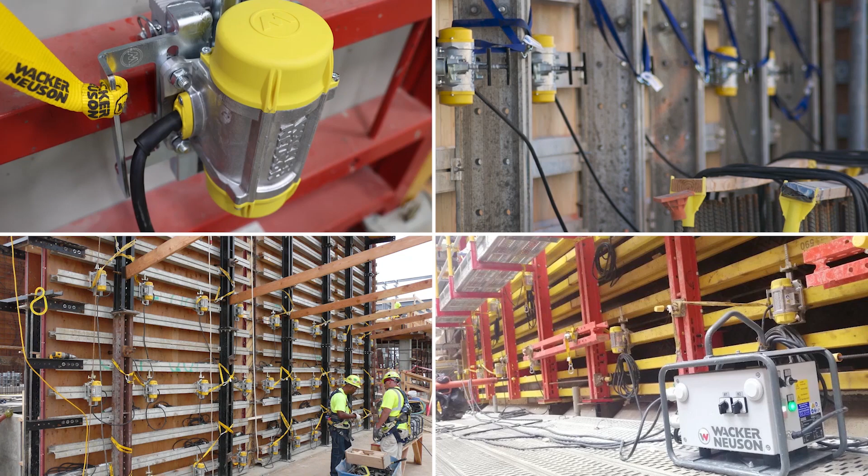Wacker Neuson offers many solutions for projects in the concrete construction industry. In this video, we're going to talk about the AR26 and ARFU26 external vibrators, their clamping systems, and the best recommended practice for different concrete consolidation applications, and how these units offer consistent power and performance.

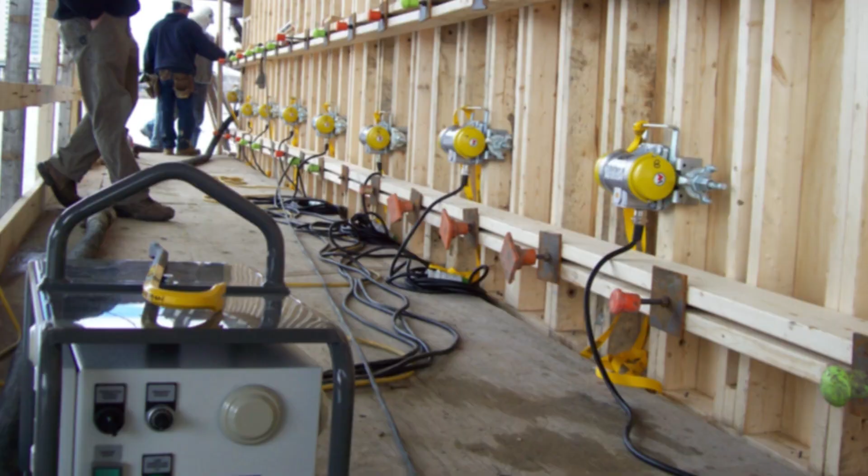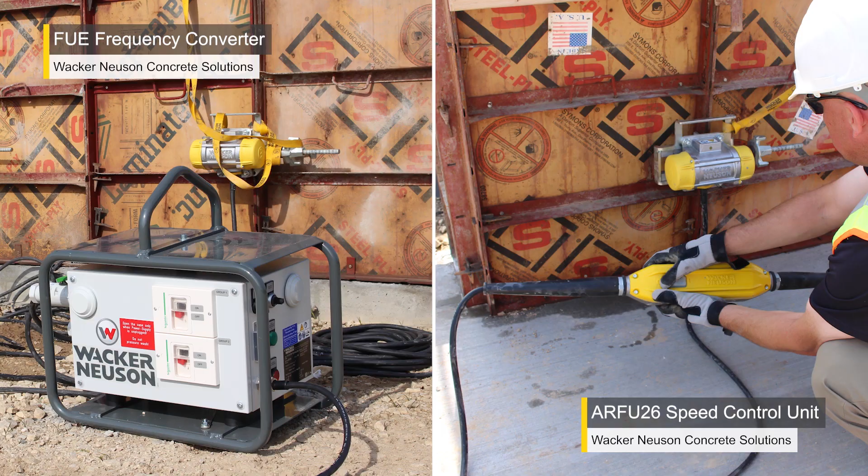Wacker Neuson external vibrators are designed for cast-in-place concrete formwork as well as light precast concrete jobs. These include areas that would be difficult to reach with internal vibrators, tall structures, or building structures with high rebar density. To control the AR26, we offer the FUE frequency converter and speed control unit. The ARFU26 is different because it runs on 120 volts and has a standard 3-prong plug.

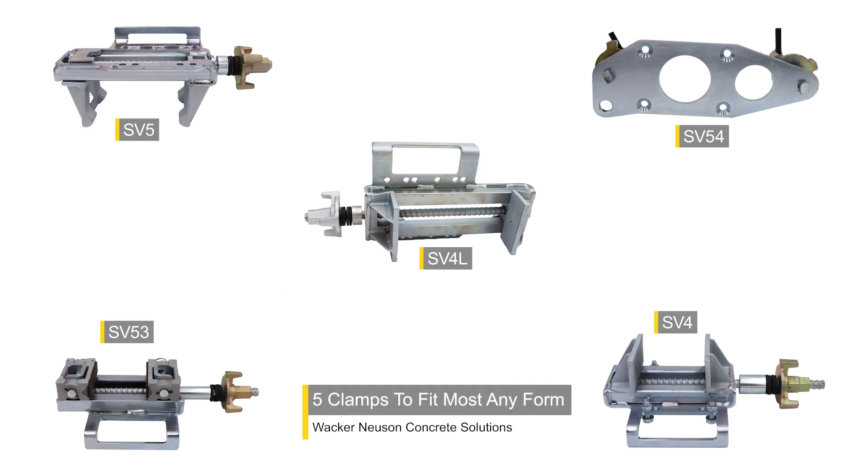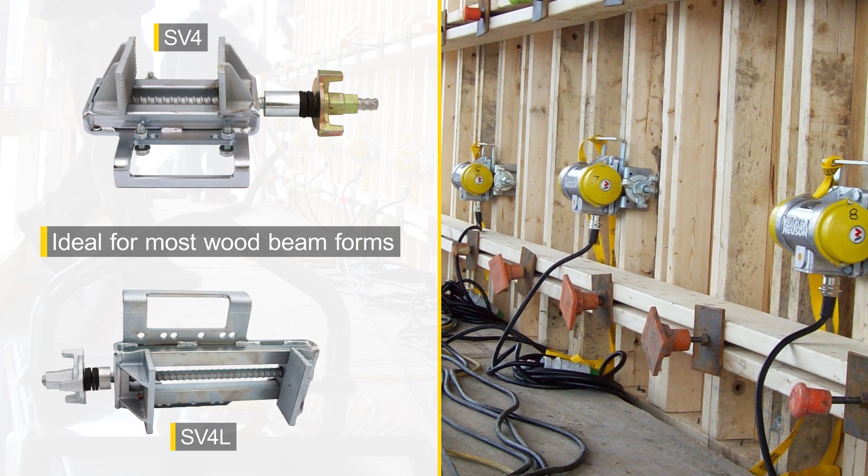Wacker Neuson offers 5 different clamping systems that are easily movable and can be applied to practically any type of vertical forming system used in the industry. They all come with a safety strap and necessary hardware for motor installation. The SV4 and SV4L are ideal for most wood beam forms. The only difference is the jaw opening size. On the SV4, the maximum opening is 4 inches. However, the SV4L can open up to almost 8 inches to fit larger beams or form joints.

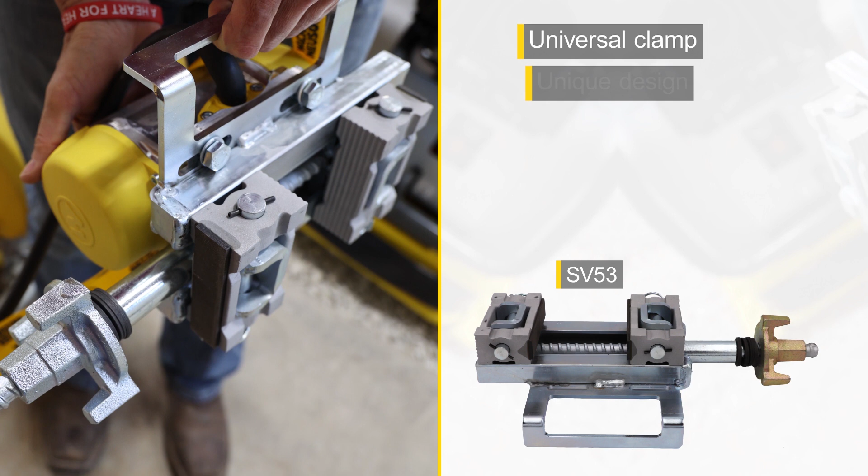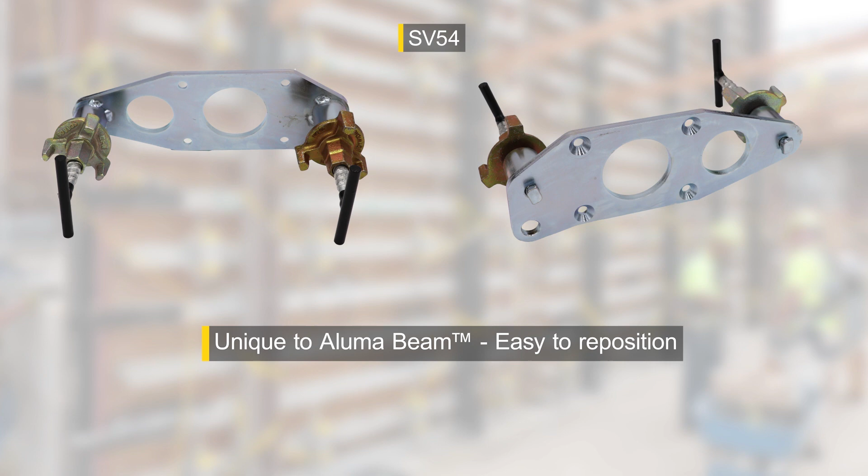The SV53 is a universal clamp that has a unique design with jaws that can be reversed to attach to either wood or steel beams, with different material on the face of the jaw. The SV54 is unique to Aluma Beam and allows for easy repositioning along the beam. The SV5 will work on most gang forms, with the flange design fitting into the inside channel of the beam design.

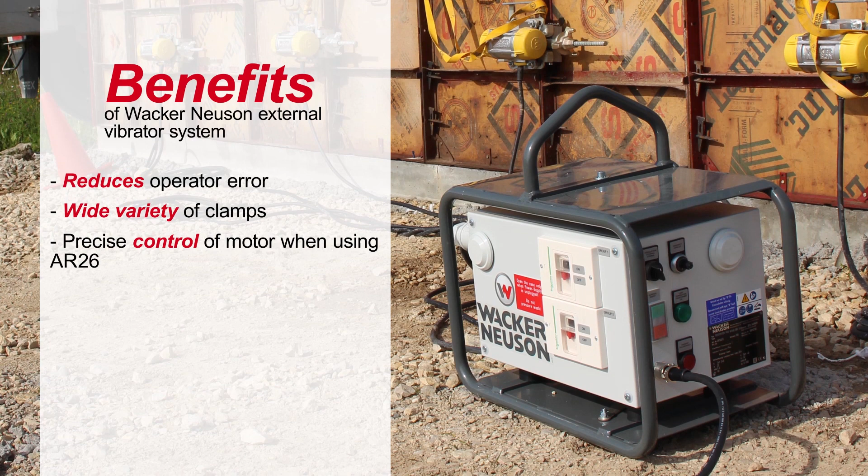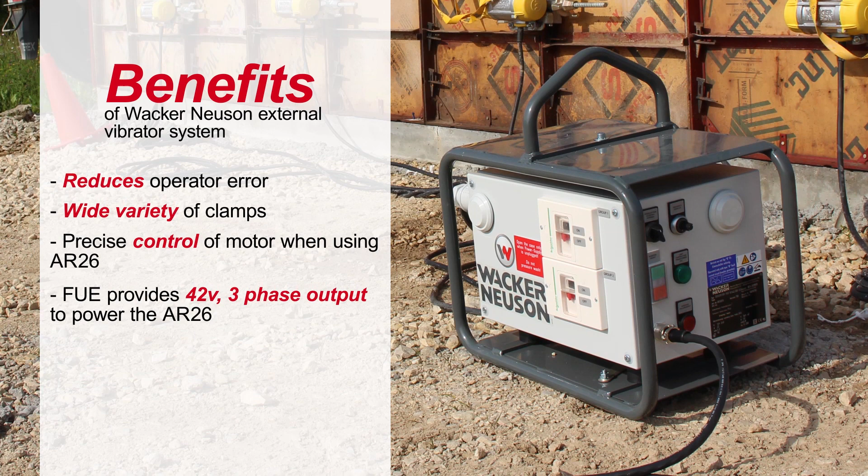So what are the benefits of using the Wacker Neuson external vibrator system? The first major advantage is that it reduces the chance of operator error when compared to using internal vibrators. As mentioned earlier, we offer a wide variety of clamp sizes for many different job sites. The FUE allows for precise control and speed of the motors when coupled with the AR26 to allow for optimum results. Powered by an external 220 volt source, the FUE provides a 42 volt, 3-phase output to safely power the AR26. Finally, the units can quickly and easily be relocated to a predetermined location on the wall to eliminate downtime.

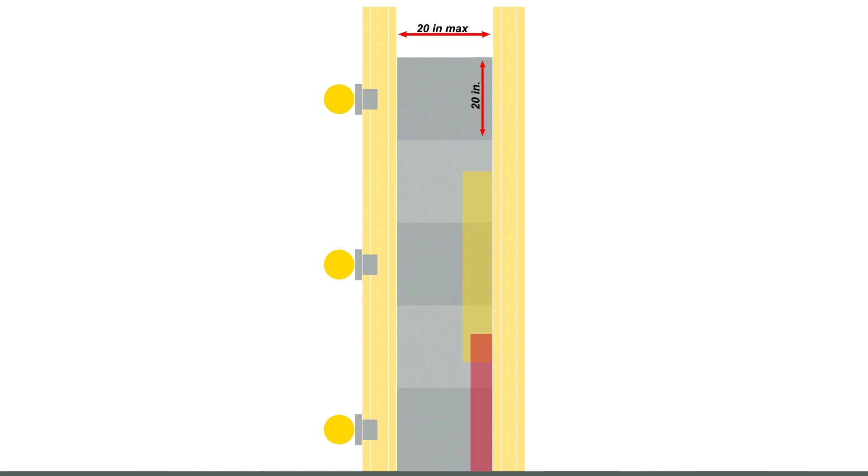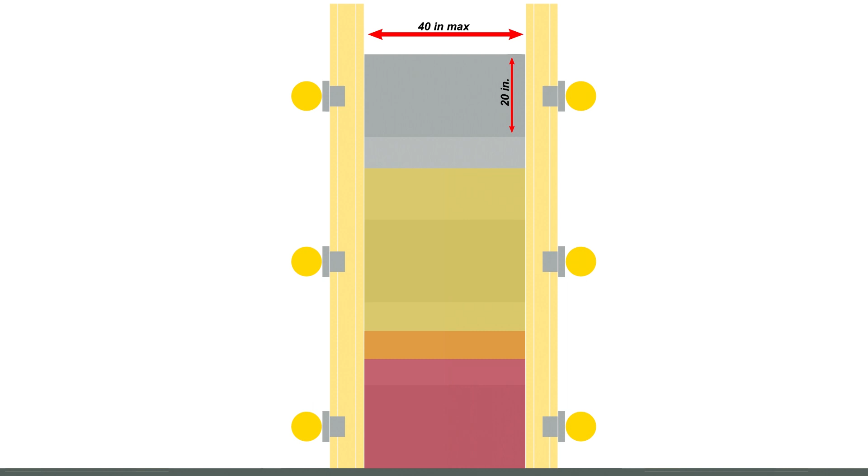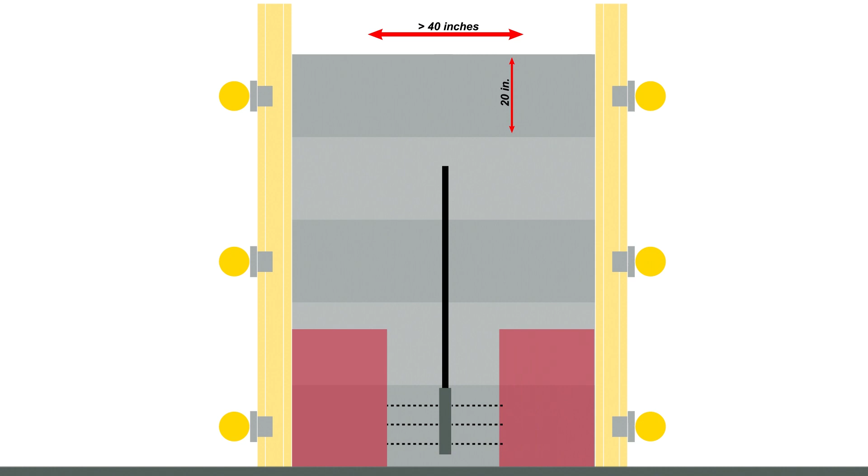The AR26 can be beneficial when consolidating concrete structures of many different thicknesses. For walls that are up to 20 inches wide, you can place the vibrators on one side and the AR26 will be able to get the job done. If the project is 20 to 40 inches wide, vibrators will have to be placed on both sides for proper consolidation. Finally, if the structure is more than 40 inches wide, a combination of both external and internal vibrators will be necessary to properly consolidate the concrete.

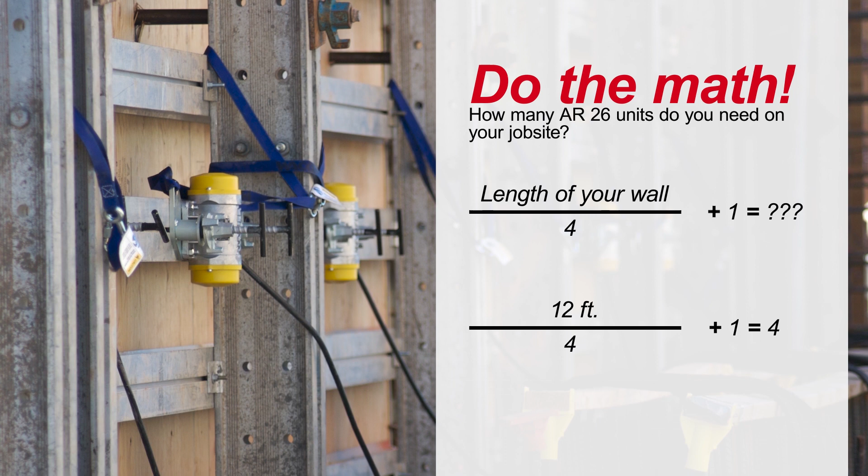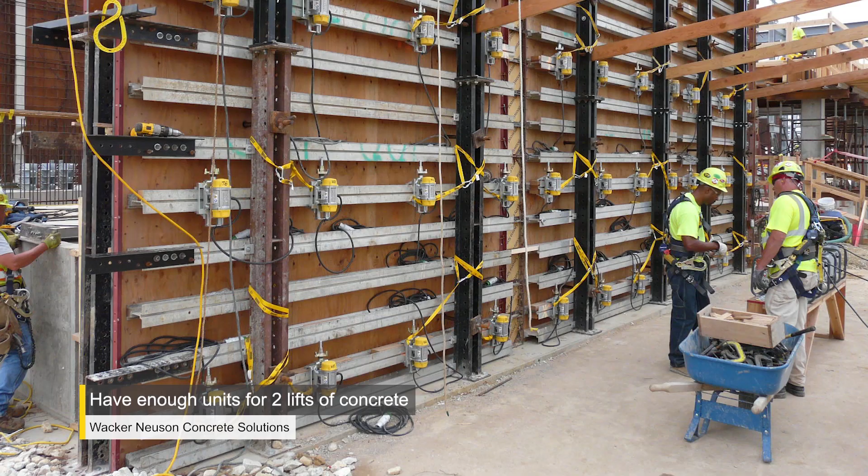To figure out how many AR26 units you need for your job, all you have to do is divide the length of the wall by 4 and add 1. So if you have a 12-foot long wall to consolidate, 12 divided by 4 is 3, plus 1 is 4 units. At a minimum, you need to have enough units to cover the first lift of concrete. However, most successful pours are done with 2 courses or more of motors.

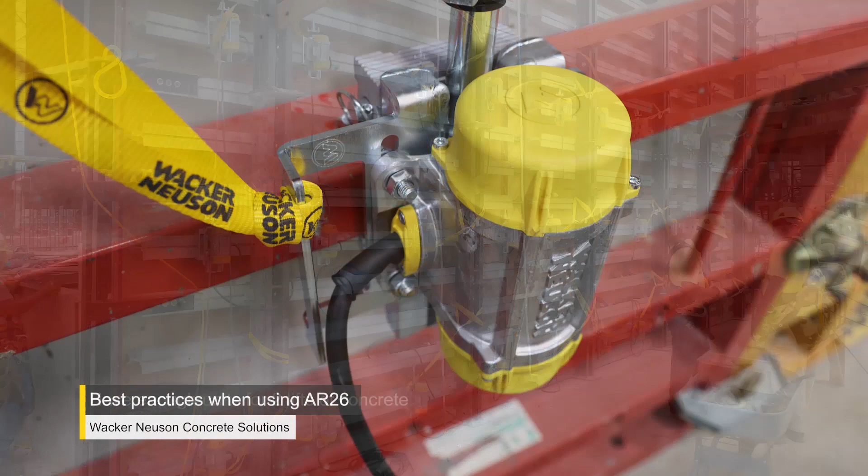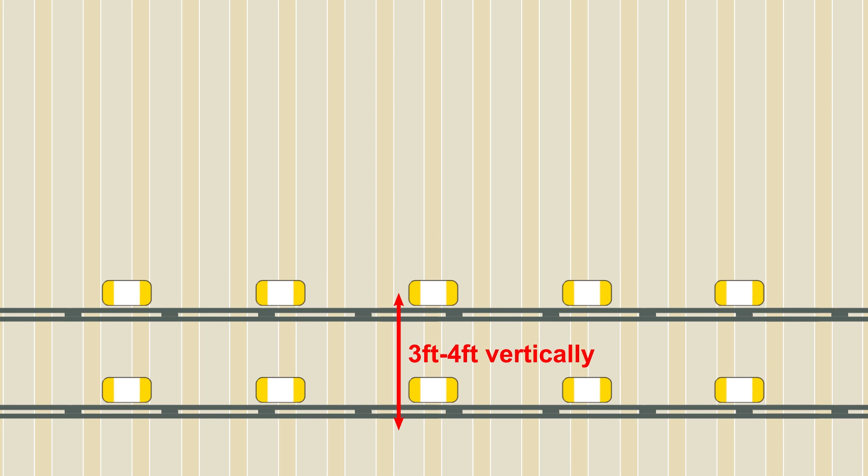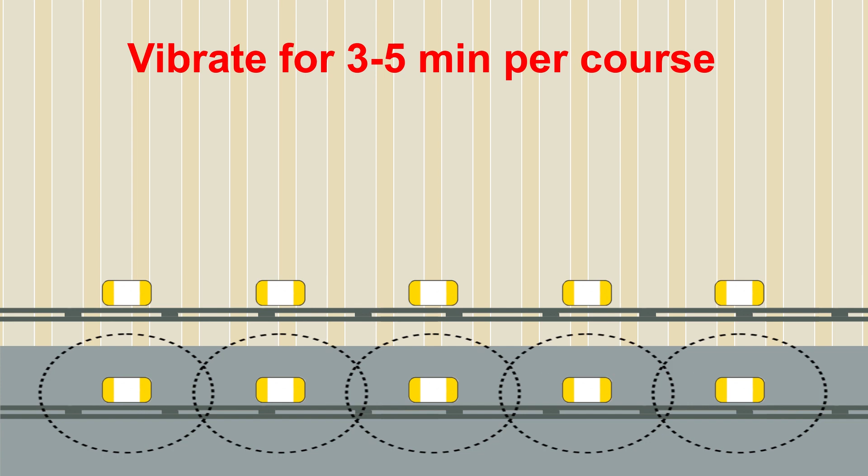Here are a few recommendations for using the AR26 on a beam or standard wall form. Recommended spacing is 12 to 18 inches off the bottom of the form and 1 foot off the corner or end of the wall, and about 3 to 4 feet depending on the concrete slump. Each course of motors should be 3 to 4 feet vertically in pre-marked locations. Finally, we recommend that you vibrate for 3 to 5 minutes per course, though runtime may vary based on the type of wall form, thickness of the wall, and consistency of the concrete. A test or mock-up panel is always recommended for any large concrete project.